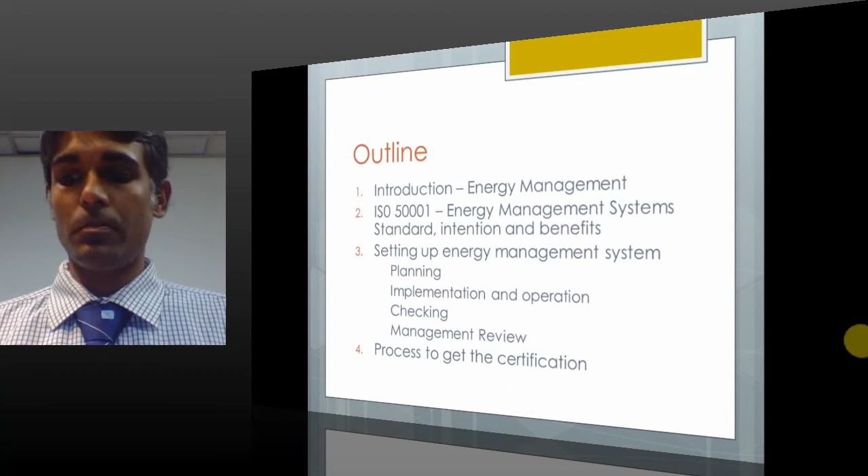So what is energy management? Energy management related, there are few definitions, and we have progressed over time. About 20 years ago, we mainly focused on energy conservation. What is energy conservation? It is reducing energy consumption through using less of an energy service. So we just turn off our lights and save energy, but we remain in darkness, kind of thing. That is called energy conservation.

That means we sacrifice some of our comfort to save energy. But at the present time, we mainly focus on energy management. What is energy management? Continuous process of optimizing energy usage without affecting quality or energy services delivered. So your comfort is not affected, but you continually reduce the energy by improvement of processes using new technology, energy efficient technology. In that way you progress. That is called energy management.

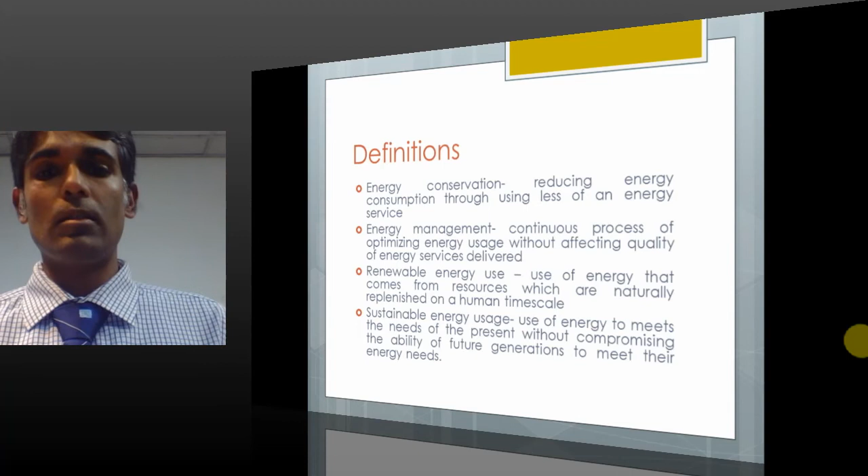And there is another thing, renewable energy usage - use of energy that comes from resources which are naturally replenished on a human time scale. This should come next, and then sustainable energy usage. What is sustainable energy usage? It is use of energy to meet the needs of present without compromising the ability of future generations to meet their energy needs. So it is a combination of energy management and renewable energy usage.

So this ISO 50001 is an energy management standard based on the second definition, but actually it touches some of the renewable aspects as well. So I think it is more suited for the fourth definition, but anyhow it is defined as an energy management standard. So what is ISO 50001?

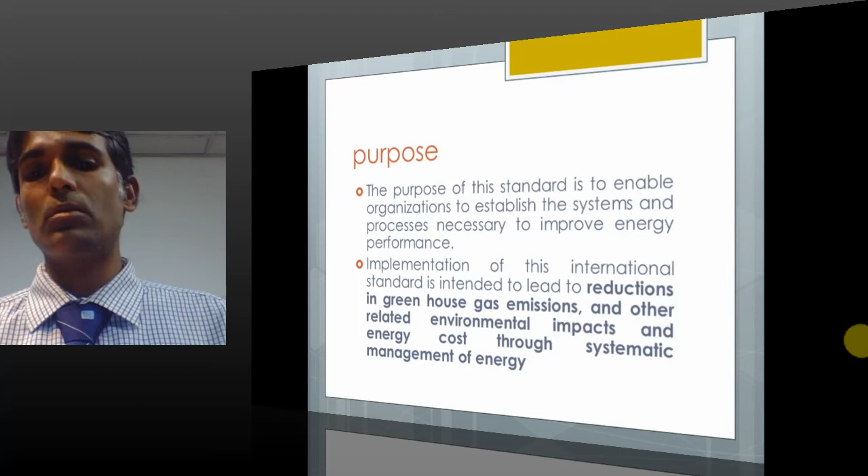Energy management put into an internationally recognized framework. It's quite the same as ISO 9000 and 14000 in the structure. So the purpose of this standard is to enable organizations to establish the systems and processes necessary to improve energy performance, and it is expected by implementing this standard to reduce greenhouse gas emissions and other related environmental impacts, and also reduce energy cost through systematic management of energy.

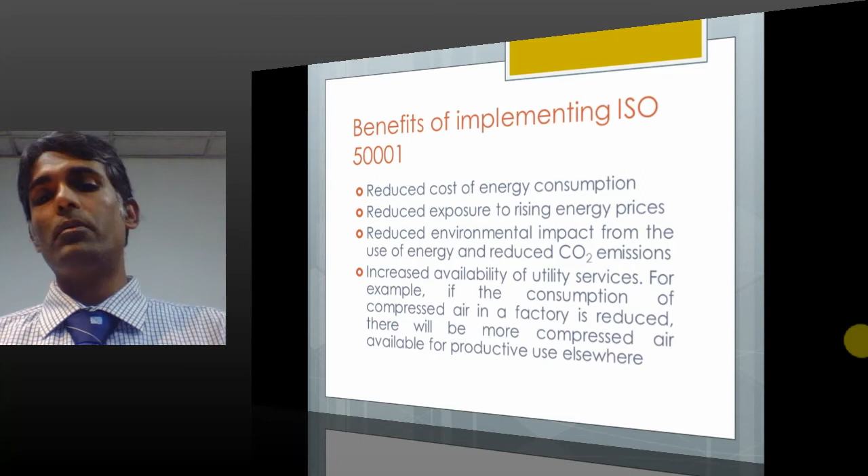For example, if the consumption of compressed air in a factory is reduced, there will be more compressed air available for productive use elsewhere. And improved control of operations leads to improved productivity and stability of operations, because operational controls related to energy are covered by this standard.

And improved comfort levels in buildings, including temperature, ventilation, lights, because when you improve the energy situation, sometimes for example, if you introduce LED lighting, most of the time you get better lux levels than the previous lighting systems, at the same time reducing energy. That is also true for air conditioning systems like that.

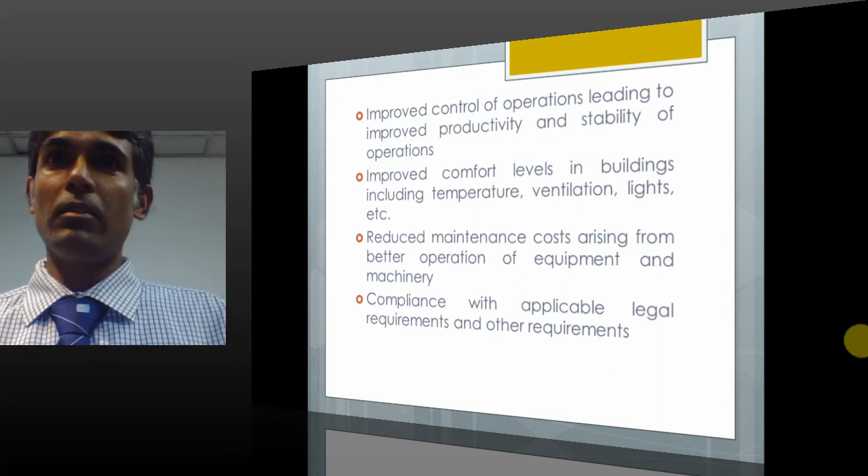And reduced maintenance costs arising from better operation of equipment and machinery, and also compliance with applicable legal requirements and other requirements. Many organizations get to know these legal requirements because of this ISO standard, because only when they are going to implement these standards are they looking for these regulations. And I have met many people while I was auditing who never knew about these energy related regulations before implementing ISO 50001.

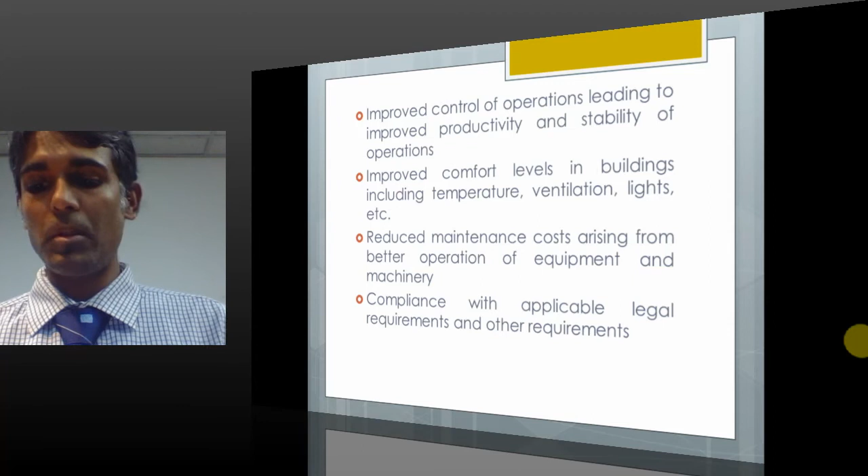So now I move on to setting up of energy management system. This starts with the top management commitment. What should the top management do? First, they should define the scope and boundaries, whether they can include whatever the processes or the buildings, whether it is covered in this standard or not, that should be defined by the top management.

And then they should define energy policy, and also appoint an MR, management representative. Usually he can be an energy manager or senior person from the organization, and energy management team. And then the top management should provide resources, human resources, technology resources, and financial resources to maintain this system.

Most of the time these systems do not work simply because the top management has very less commitment. Sometimes they just want to get the certificate, but after that they are not providing these resources. And also the top management should communicate the importance of energy management system to the organization.

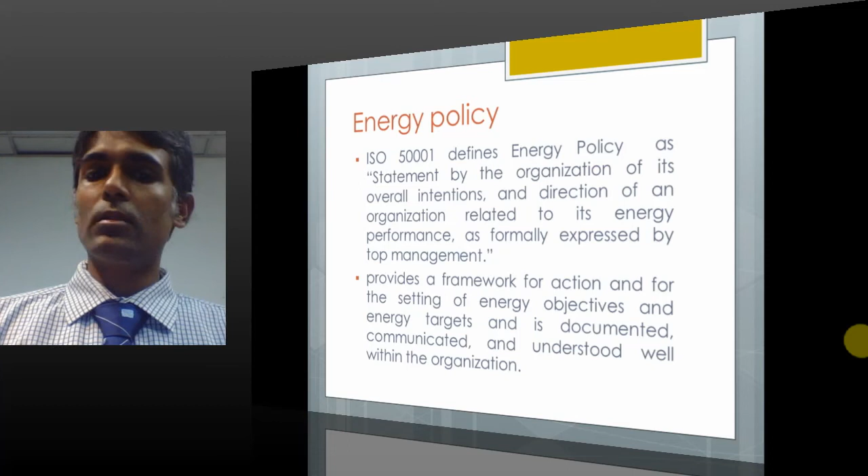So this is energy policy. What is energy policy? Energy policy is the statement by the organization of its overall intentions and direction of an organization related to its energy performance, as formally expressed by the top management. It provides the framework for action and for setting of energy objectives, targets, and is documented, communicated, and understood well within the organization. So it actually provides the framework for future action, a brief document.

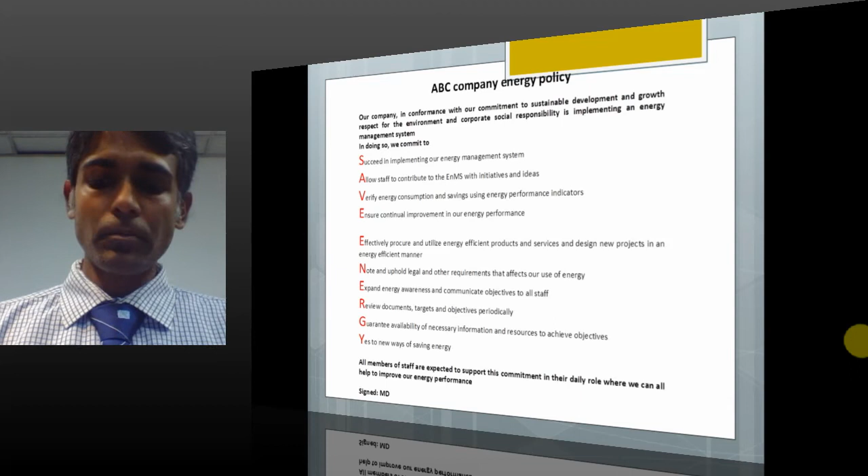This is a sample energy policy, a very simple document, one page, and it says save energy, and each of these sentences, if you take together, address the above mentioned points that should be included in the policy.

So the role of management representative is to ensure the energy management system is established, implemented, maintained, and continually improved in accordance with the standard, and he should identify persons within the energy management team and define responsibilities, and he should report to the top management on system performance and energy performance and promote awareness of energy policy and objectives to the organization.

So once the initial setup has been done, then we move on to the actual implementation of the standard, and it is based on the PDCA cycle: planning, doing, checking and act. The planning phase constitutes conducting energy review, establishing energy baseline, energy performance indicators, objectives, targets and action plan in accordance with the organization's energy policy.

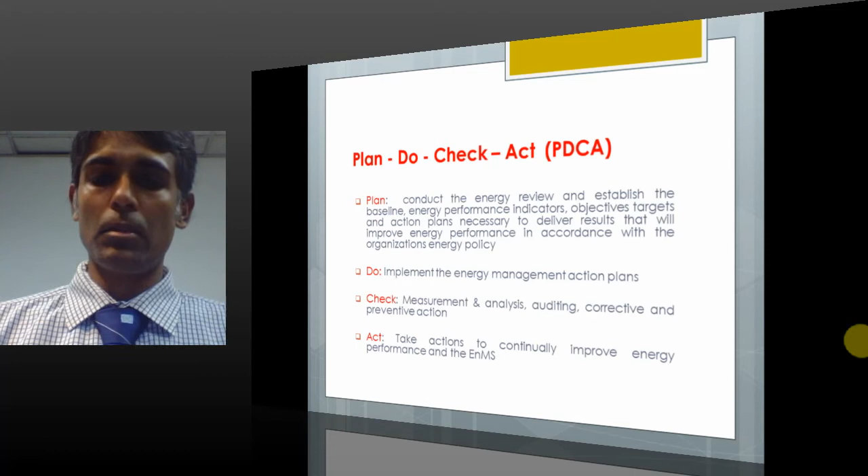The do phase is implementing the energy management action plan. The check phase is measurement and analysis, auditing, corrective and preventive action. And there's also the act phase, take actions to continually improve energy performance and the energy management system. The act phase is actually the management review.

So energy planning phase, what should you do first? First you should understand the legal and other requirements that would affect your energy management system. You should thoroughly study the legal and other requirements related to this energy management system that can be directly energy related, environmental related, safety and health and quality.

For example, for safety and health, there are regulations on standard lux level that should be maintained in factories, so that you just cannot reduce the lux level arbitrarily. In that case, you should know these kind of regulations, although they are not directly on energy, but on safety and health.

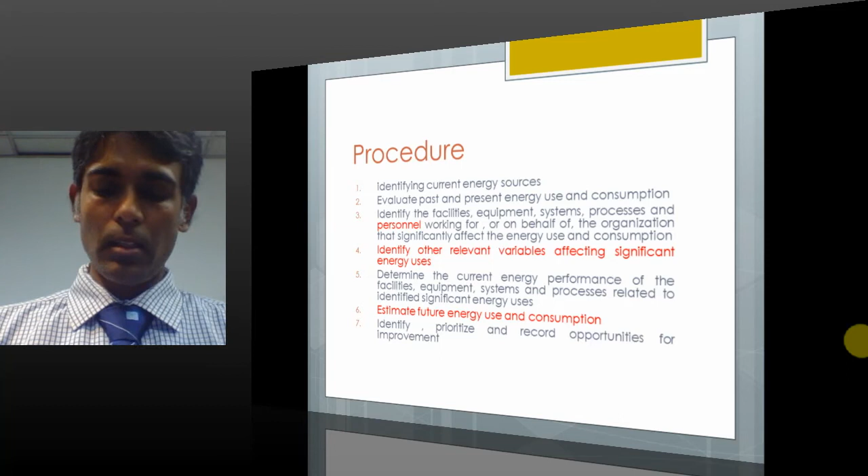So what do you mean by identify current energy sources? If the company uses several types of energy, you should first identify these things, and then evaluate past and present energy use and consumption. What do you mean by this?

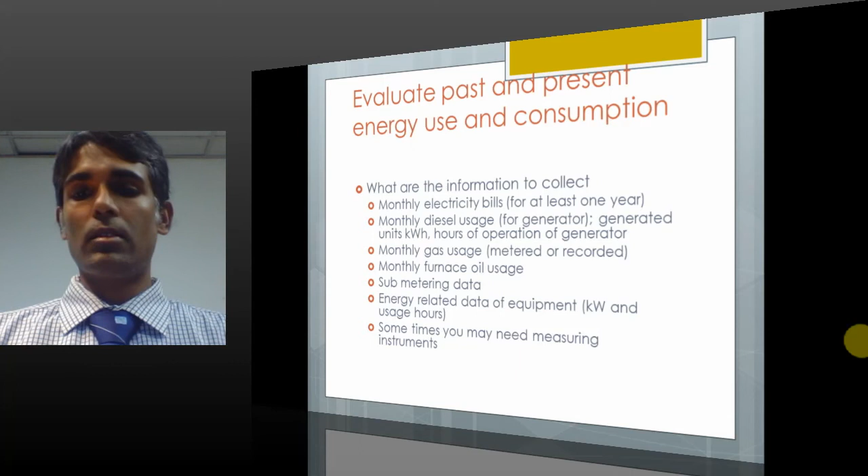So these are the information to collect: monthly electricity bills, diesel, gas, furnace oil, the kind of energy usage records, and then submetering data, energy related data like kilowatt and usage hours of equipment. And also sometimes if you don't have this kilowatt values on the nameplates, you can use measuring instruments to get the values.

By using this information, you need to identify the facilities, equipment, systems and processes that become the significant energy users. How do you do this? Using the simple way, with the information collected you can construct the energy balance. Your largest energy consumers generally become the significant energy users, unless you have already made some improvements. And if there are fewer improvements that can be made to the largest energy consumers, then other smaller ones that offer significant opportunities can be considered as significant energy users.

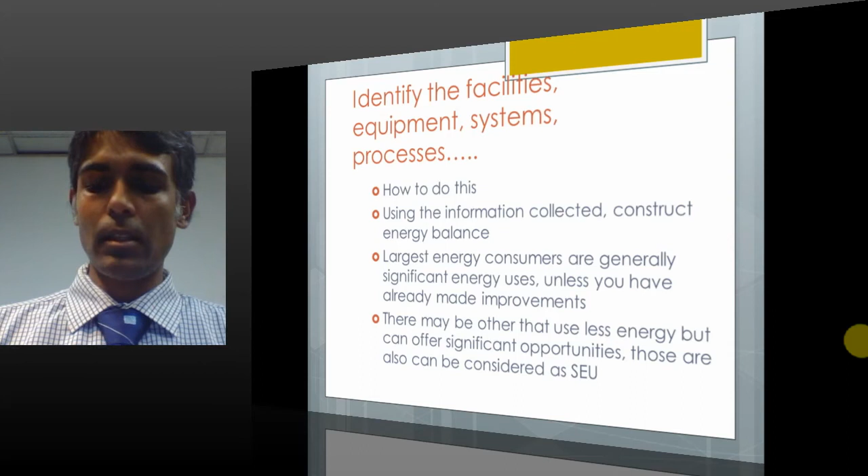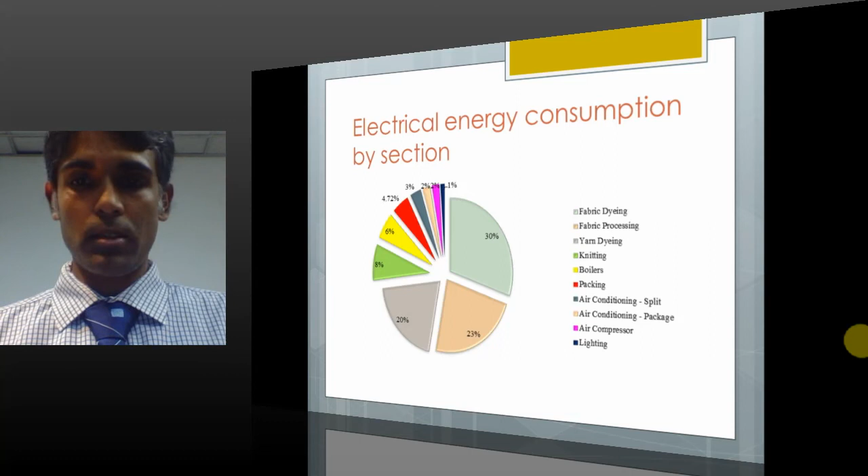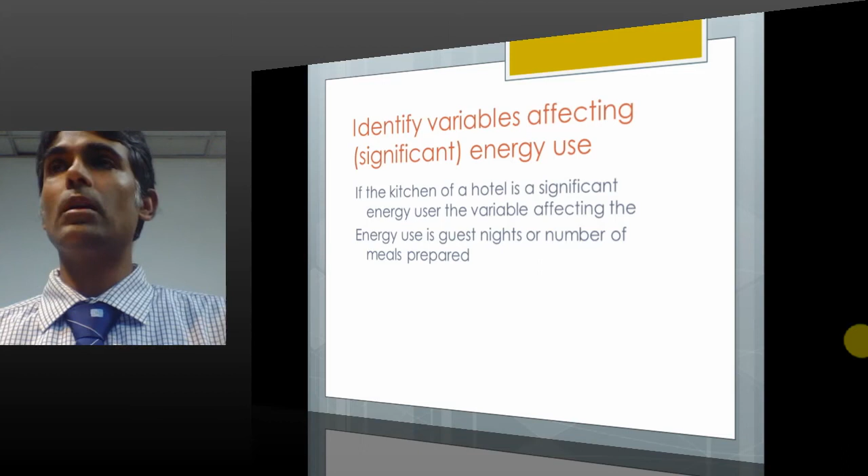After identifying the significant energy users, you need to identify the variables affecting significant energy use. For example, if the kitchen of a hotel is a significant energy user, the variable affecting the energy use is guest nights or number of meals prepared. These kinds of things you need to identify.

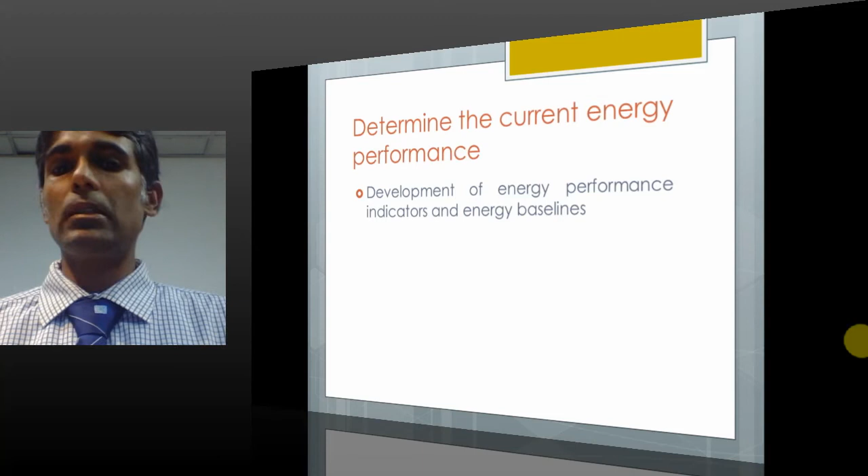Then you need to determine the current energy performance. That means you need to develop energy performance indicators and energy baselines. And then you need to identify, prioritize and record opportunities for improvements. If the system is not complex, you may do it yourself; otherwise you may need the service of an energy auditor. The energy auditor can identify the opportunities that can be implemented for saving energy. The future energy use and consumption should also be estimated to get a forecast for the next year. If you have an estimate of production for the next year, you can get the energy forecast based on the performance models developed.

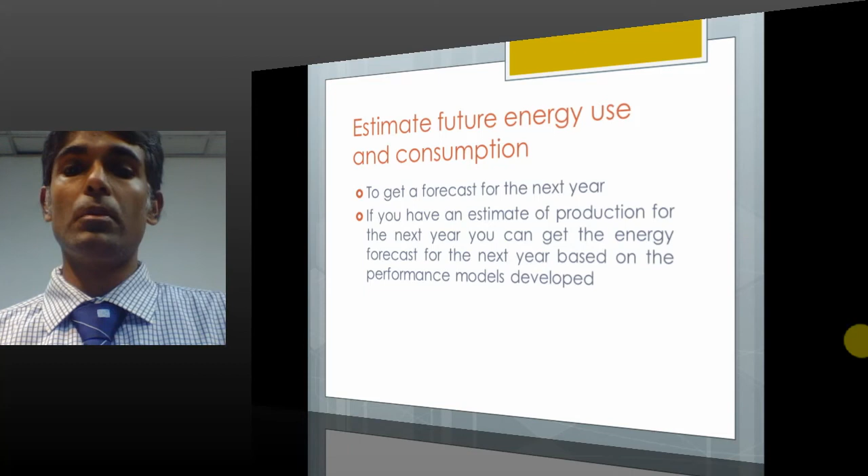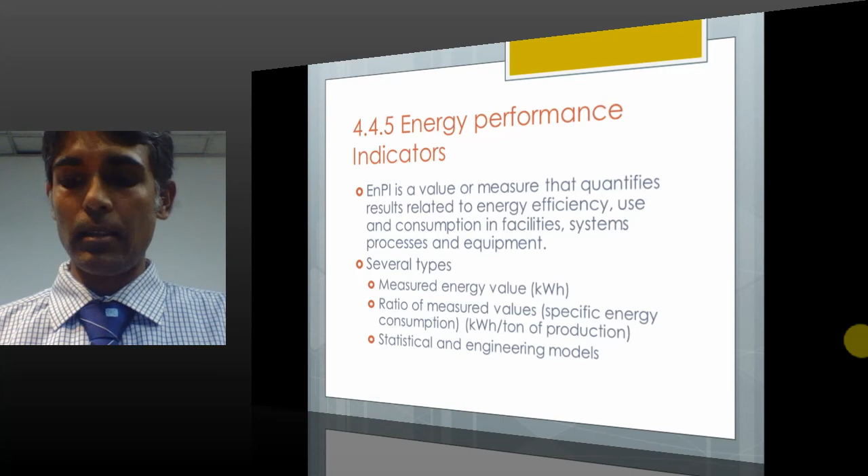So what are the energy performance indicators? Energy performance indicators are of several types. You can use the measured energy value, and also the ratio of measured values. For example, specific energy consumption, that is kilowatt hour per ton of production. If there is no base load, you can use this ratio of measured values. A measured energy value alone is not a very good energy performance indicator because it does not account for variable factors. There can also be statistical and engineering models serving as energy performance indicators.

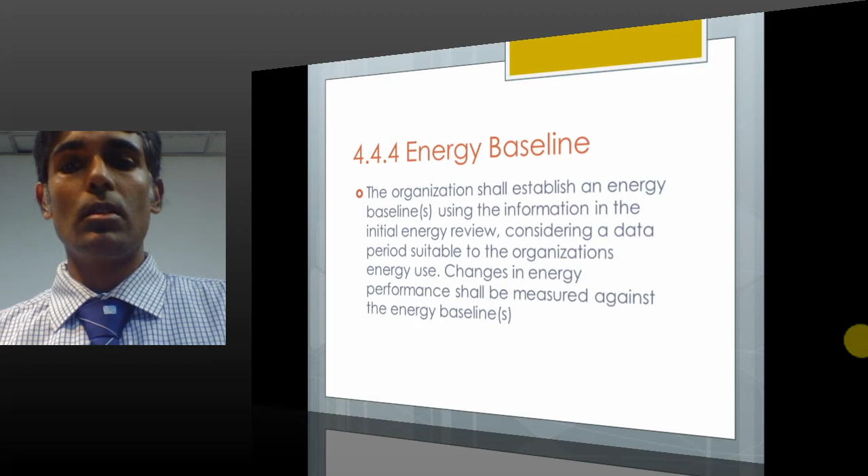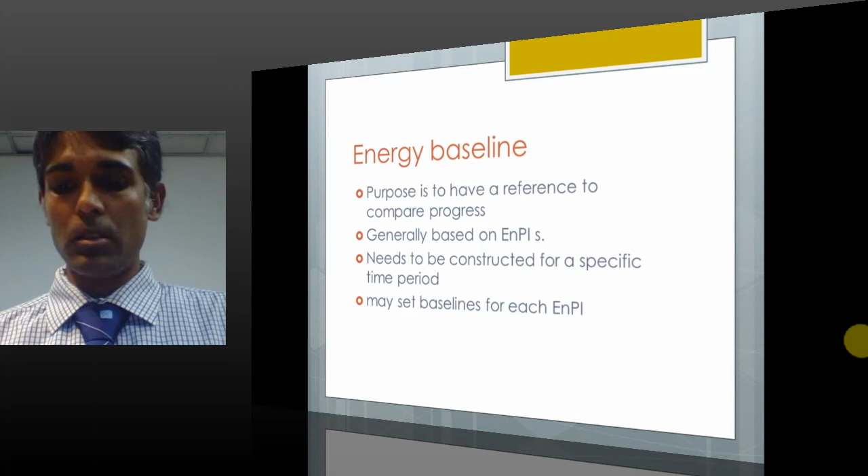So the baseline — the energy performance indicators and the baseline. What is the baseline? The organization shall establish an energy baseline using the information in the initial energy review, considering a data period suitable to the organization's energy use. The purpose of the baseline is to have a reference to compare progress. Generally, it is based on energy performance indicators constructed for a specific time period. You may set a baseline for each energy performance indicator. To explain it, I have taken a real example.

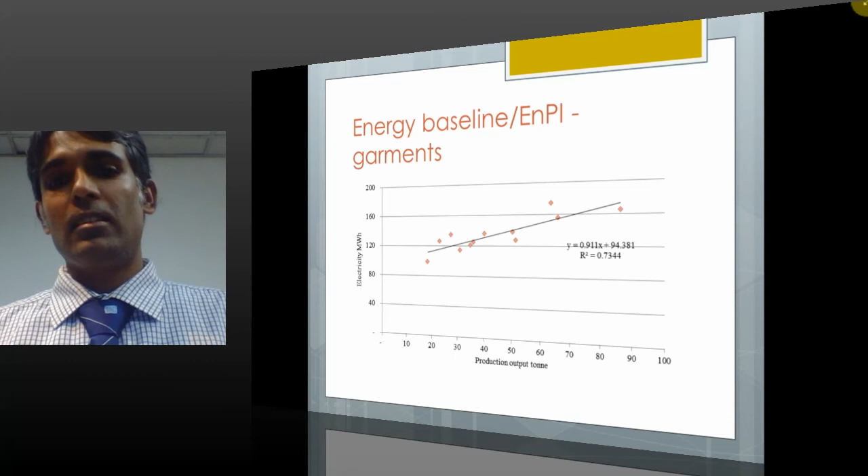So what's an objective? An objective has a broader scope than a target. You can set an objective for a significant energy usage, such as reduction of firewood usage — just a simple thing. A target is more specific, such as reduction of steam usage for the dyeing process by 5% from the set baseline. You can also set a date for achieving it.

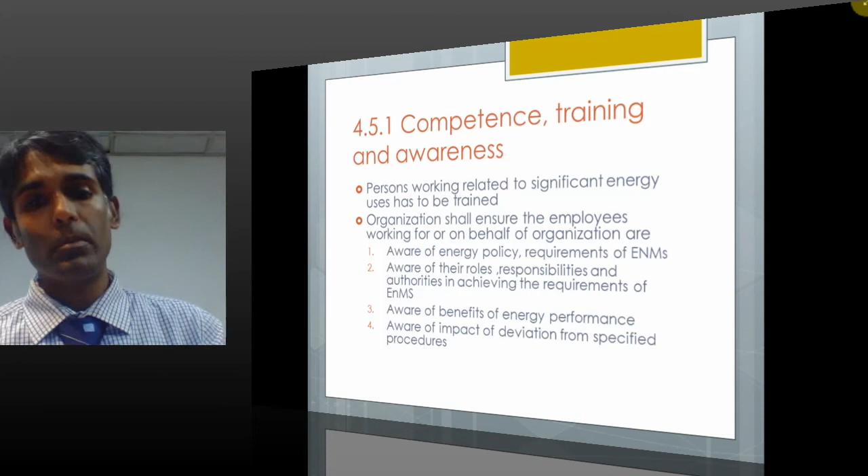So competence, training and awareness. Persons working related to significant energy uses have to be trained. The organization shall ensure employees working for or on behalf of the organization are aware of the energy policy and requirements of the energy management system, aware of their roles, responsibilities and authorities in achieving the requirements of the energy management system, aware of the benefits of energy performance, and aware of the impact of deviation from specified procedures.

And the organization shall communicate internally and may communicate externally about the energy management system. To get the ideas of the personnel of the organization, you need to implement some system. You can place a box where the employees can put their ideas, which you will collect to get better ideas for better implementation of the standard.

So then you need to have documentation. What is a document? Information used to support an effective and efficient organization operation, usually generated within the planning phase. So there's a difference between a document and a record. Documents can change. If you are familiar with other ISO systems, you may remember that documents have versions - version 1, 2, like that - but records don't have versions.

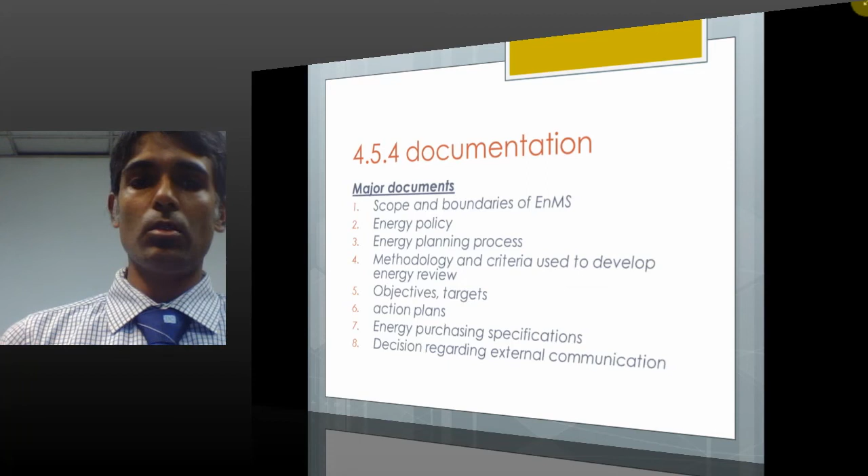They are actually a snapshot in time - you can't change the records. So these are the major documents: energy policy, scope, boundaries, planning process, like that. There are 8 compulsory documents, and generally these documents are organized as an energy management manual. It would refer to the procedure manual, and procedures referring to formats and other exhibits.

This documentation need not be in printed format - you can use electronic format as well. And the organization shall establish, implement and maintain procedures for effective document control. I am not going into detail, but you can refer to the standard to identify what has to be done for document control.

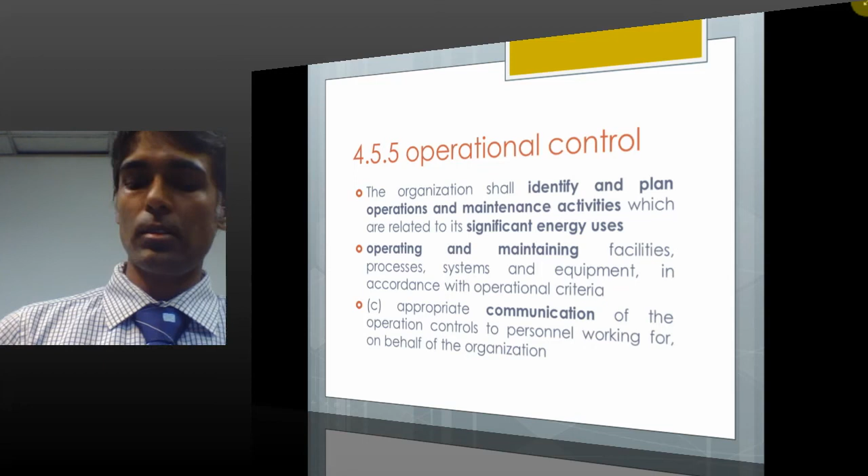So the documentation, communication, and then it comes to actual implementation - the operational control, design and procurement. Operational control means the organization shall identify and plan operations and maintenance activities which are related to its significant energy uses, and operate and maintain facilities according to operational criteria, and also appropriately communicate this operational control to the personnel working for the organization.

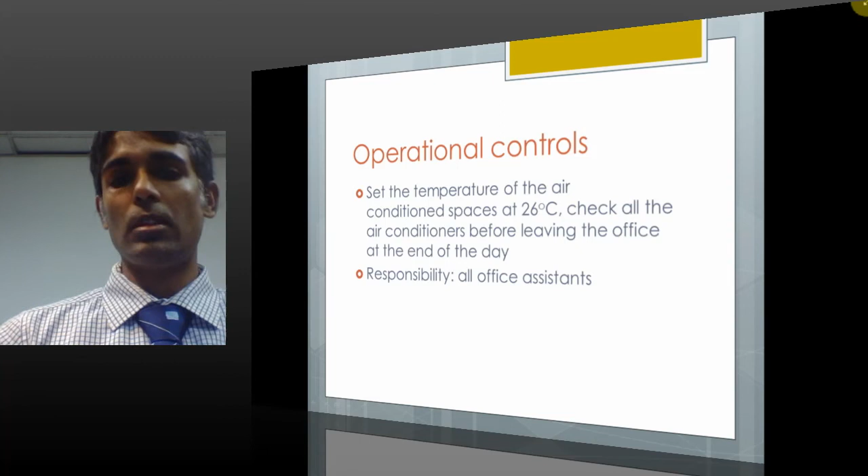Check all the air conditioners before leaving the office at the end of the day - responsibility has been given to the office assistants. For a poultry-processing plant, blast freezers account for about 67% of the total energy usage, and the workers must know that the blast freezers should be loaded only when the weight of chicken exceeds 100 kilograms. If not, what will happen is they just open the door for a lower load, and then a lot of cold air comes out, causing a lot of energy wastage.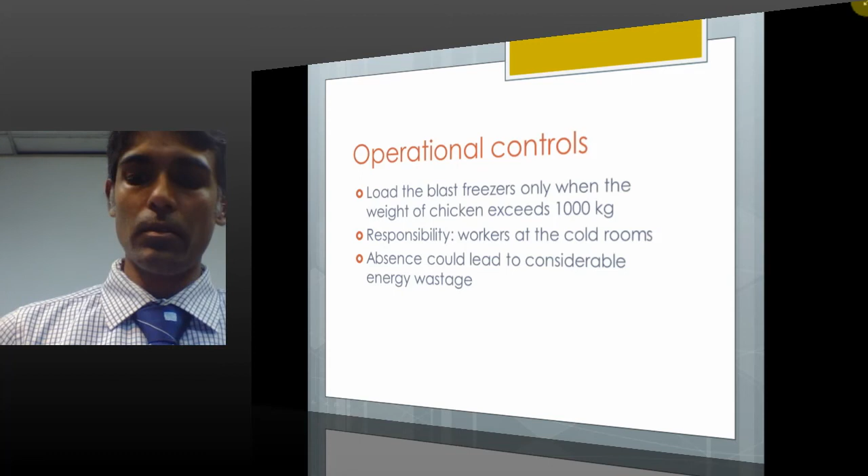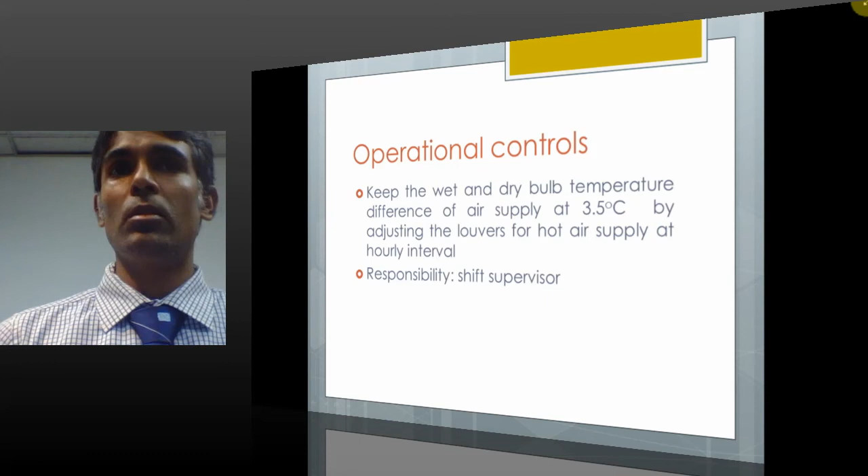For the tea industry, 50% of electrical energy is used for the withering process. This can be minimized by controlling the wet and dry bulb temperature difference, meaning the relative humidity and temperature can be effectively controlled. If you do not put the value at 3.5 degrees difference and above, you will not get the required withering, it will be over withered. Below that, it will take more time, and the fans may be operated for many hours, maybe 3 hours or more.

Because the drying rate can be correlated to the wet dry bulb temperature like this, there is a drastic reduction in drying rate if you reduce the wet dry bulb temperature to 2 degrees centigrade. So it's a very significant operational control.

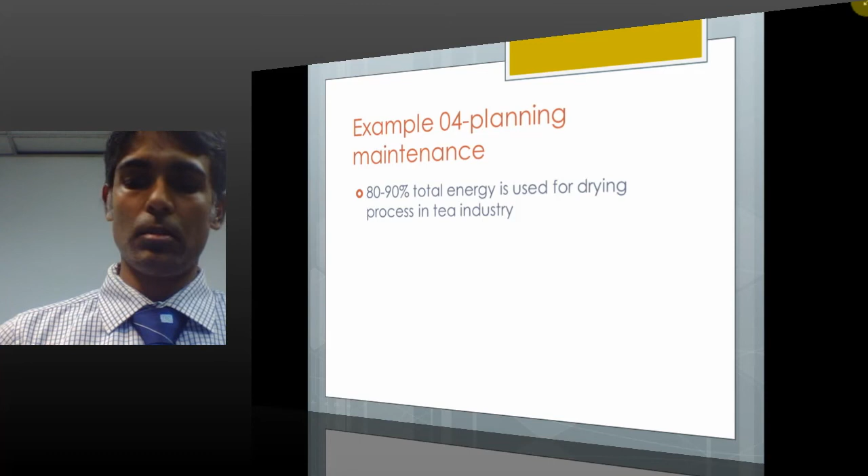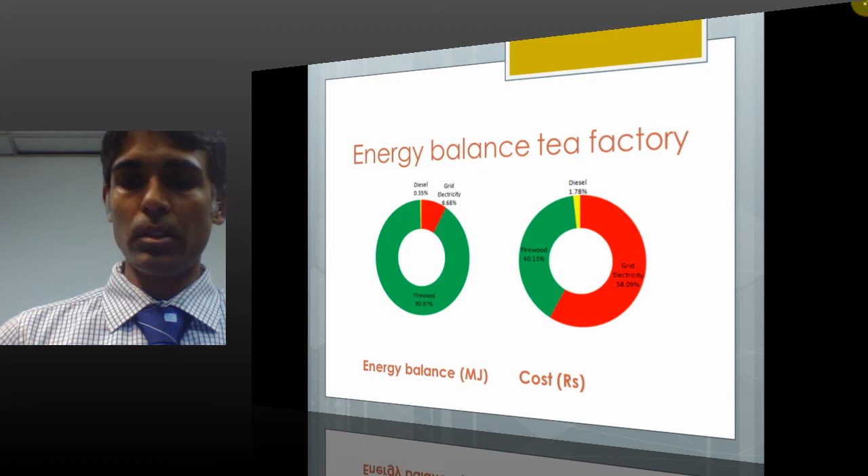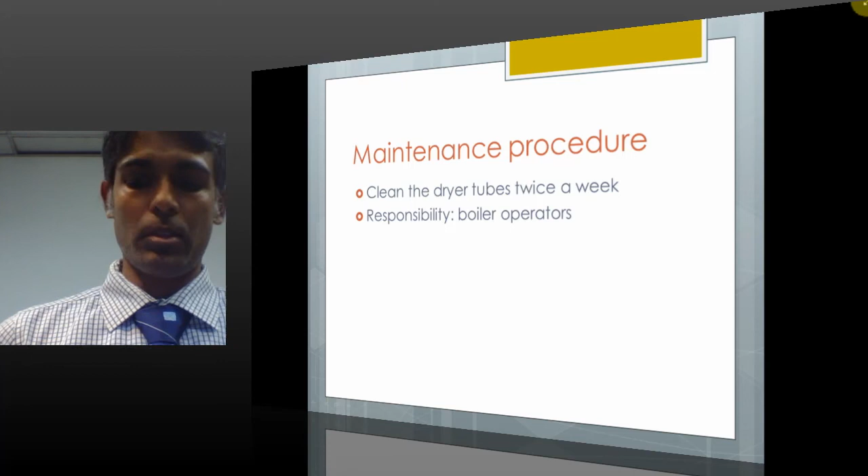These operational controls apply not only to parameters like temperature, pressure, and relative humidity, but also to maintenance aspects. For example, in a tea factory, firewood consumption accounts for about 90% of the total energy, so it's a significant energy user. To reduce firewood usage, one thing you need to do is clean the dryer tubes very frequently, because if soot deposits on the dryer tubes, you will consume more firewood to get the required heating effect. So it is quite obvious that the boiler operators should be informed about this operational control.

This communication to the workers can be verbal, printed, or in any form. Workers should be knowledgeable of the consideration. So operational controls, I think, are clear to you now.

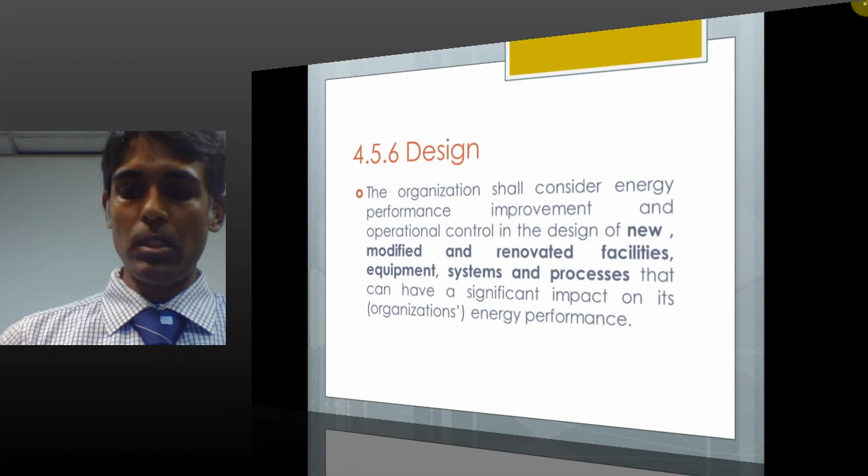Then what we should do is focus on the design. If the organization is designing new, modified, and renovated facilities, energy performance improvement has to be considered. The result of the energy performance evaluation shall be incorporated where appropriate into the specification, and once the construction has been finished, the result has to be recorded.

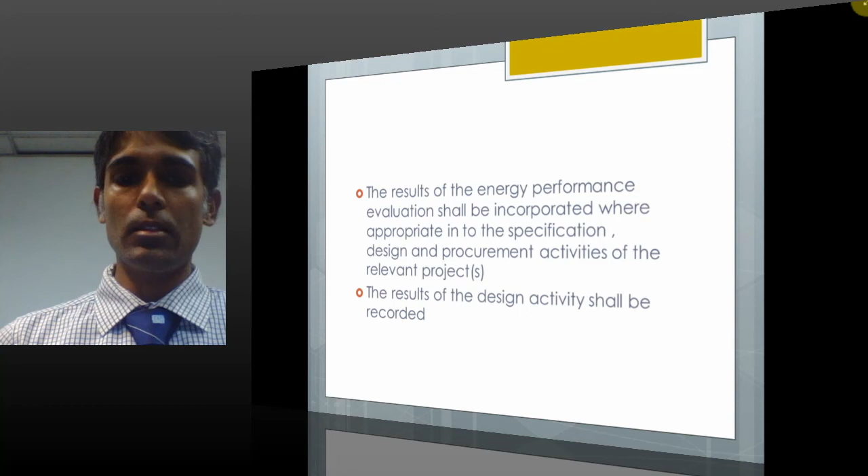For example, if you are designing a new building, you can ask the contractor to comply with building code and submit an evaluation of energy usage.

For example, if you are designing a pumping system, there may be several options: one pump with throttling, two smaller pumps in parallel, or one pump with VSD. In terms of energy consumption, the one pump with throttling may be quite a high energy consuming option, but initial cost may be low, so sometimes it may be costlier over time. You can go for the one pump with VSD option.

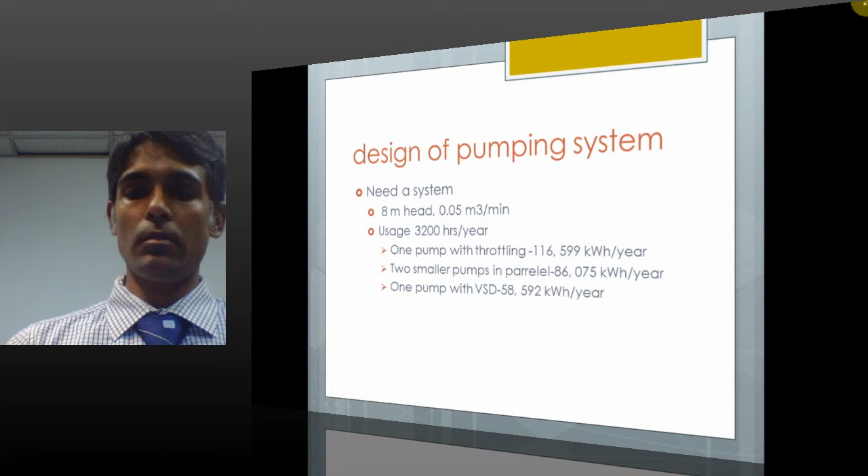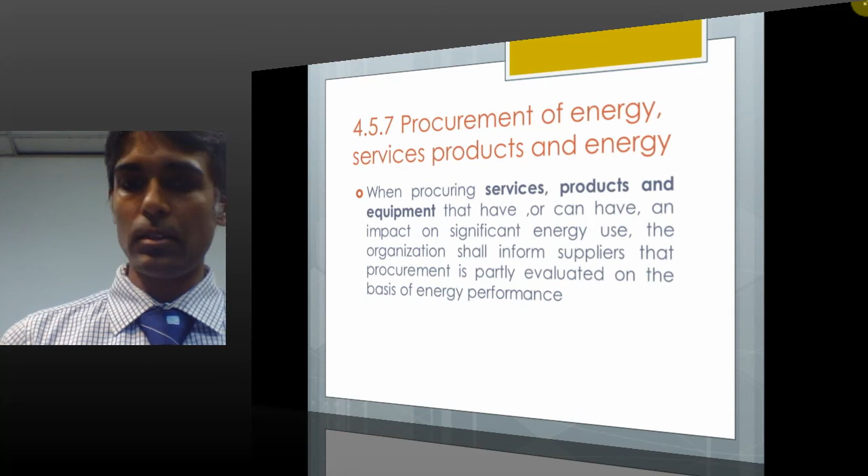In procurement of energy services, products, equipment, and energy itself, you need to establish criteria for assessing energy consumption and efficiency over the expected lifetime. You need to define criteria for purchasing energy using equipment for the significant energy users.

For example, for lighting, you can set a criteria that we are going for life cycle cost for this kind of application. For example, if you use incandescent lamps, the total cost is not only the lamp cost but the energy cost, and there can be several lamp replacements. So the total cost for incandescent will be 7,200, and if you go for LEDs, it's only 2,100.

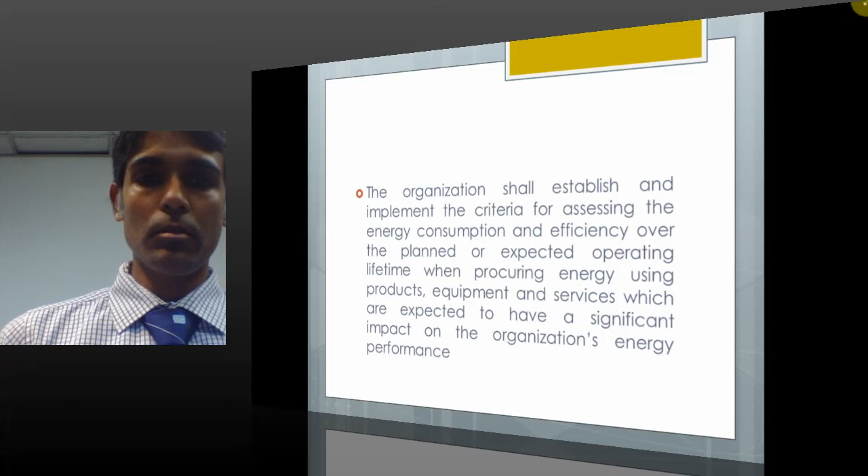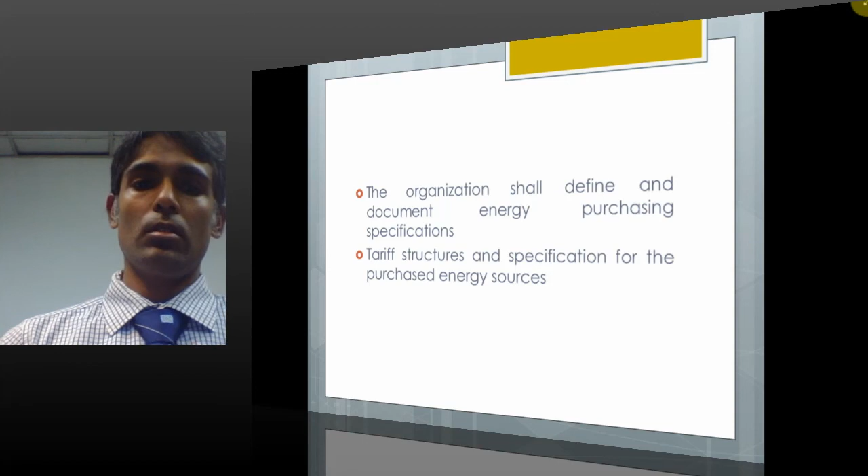The organization shall also define and document energy purchasing specifications. What are the energy purchasing specifications? Not only for energy using products, services, and equipment, but also if you are purchasing energy, you should develop specifications for the purchased energy sources, because in some countries there can be cheaper energy providers. In our case it is not applicable, because anyhow the tariff structure is quite the same for organizations, since we need to go for CEB or LECO, and they follow the same structure.

After that we move on to the check phase: monitoring, measurement and analysis, evaluation of compliance with legal and other requirements, internal auditing, non-conformities, corrective and preventive action, and control of records.

So, monitoring, measurement and analysis: what to monitor? Significant energy users, relevant variables related to significant energy users, energy performance indicators, effectiveness of the action plan in achieving objectives and targets, and also evaluation of expected versus actual energy consumption.

There should be an energy measurement plan, which should be defined and implemented. It should include what is measured, the measuring instrument, the interval of measurement, and responsibility, and should use reliable measuring instruments, meaning the measuring instrument should be calibrated.

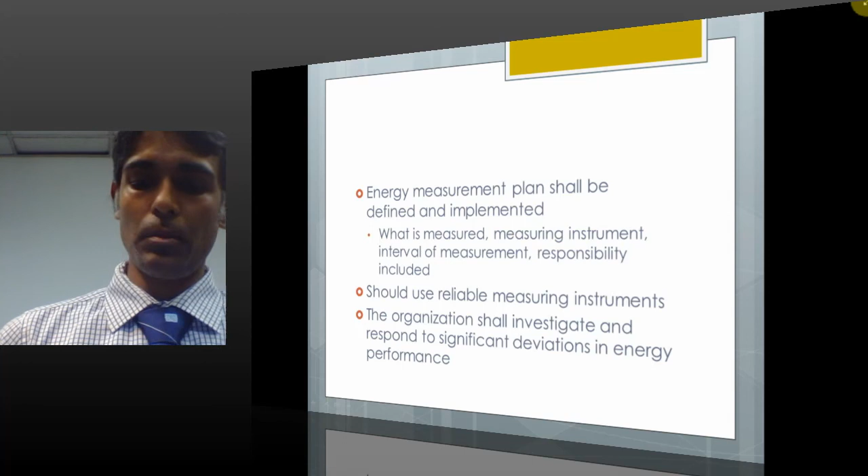The organization shall investigate and respond to significant deviations in energy performance. And even in this phase, the legal requirements should be reviewed.

Then you should do internal auditing. Basically what you do in an internal audit is quite the same as for the external audit. Different departments of the same organization audit the other departments to check whether they comply with the standard. So in this case, the audit plan should be developed considering the importance of the processes and areas to be audited, and also the results of previous audits.

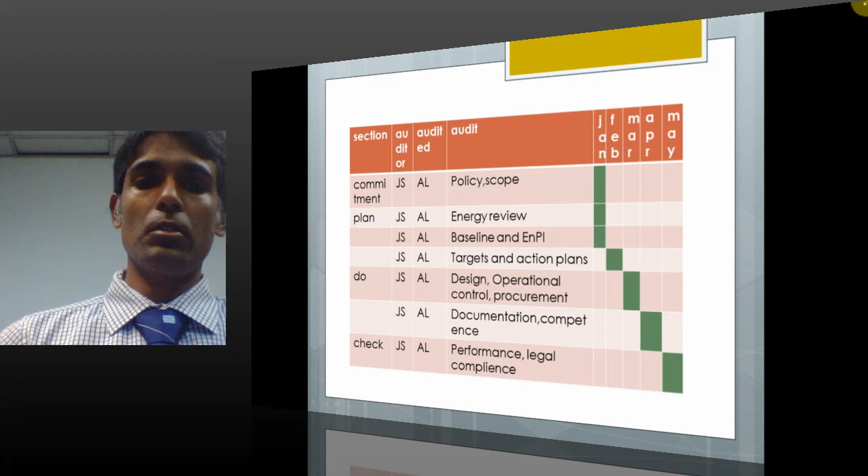Selection of auditors and conduct of the audit shall ensure objectivity and impartiality. Records of the audit should be maintained and reported to top management. At the management review, you should present it to top management. So this is a kind of audit plan, where one department audits another department on the policy, energy review, baseline, and similarly on various clauses of the standard.

And in the audit, non-conformities can be raised, and you need to take correction, corrective action, and preventive action. What's a correction? It's an immediate action taken to rectify a non-conformity.

For example, in the internal audit it has been revealed that a higher temperature has been used in an oven, so the temperature should be lowered. So what is the correction? You can set the correct set point, but that is not the corrective action, because it can recur since the operators are not trained. So training the operators is the corrective action.

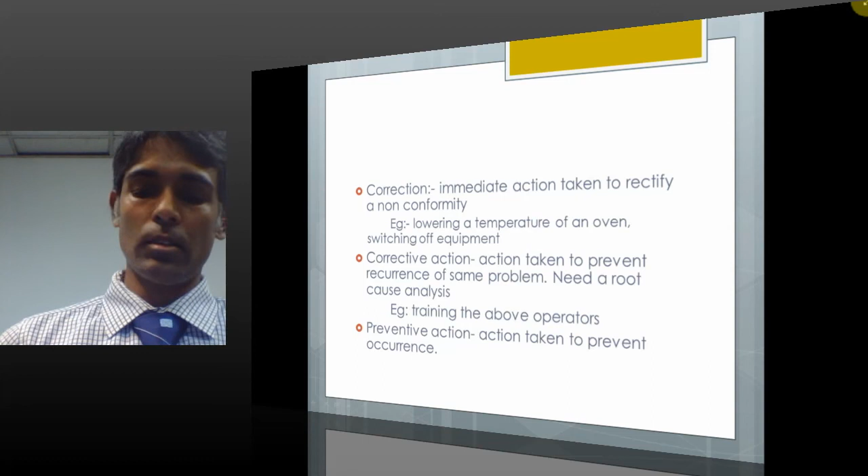So now I think we have completed 3 phases: plan, do, check, and the final one is act. Act phase. What are you going to do? It is typically a regular meeting, called management review, of top management to help consolidate their support for the energy management system. It serves 2 main purposes: to communicate to them what is happening in the EnMS, and also to gain support and make decisions to aid progress in the future.

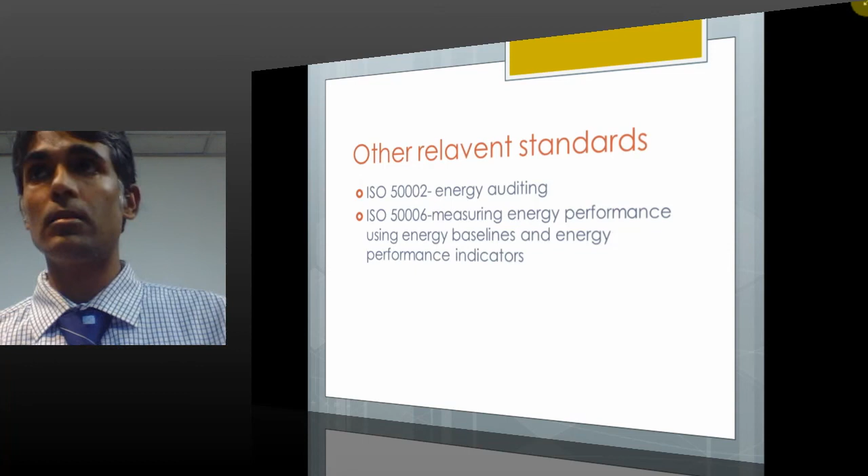So you can get this standard and read it; it is more elaborate on energy performance indicators and baselines. And that is the lecture for today.

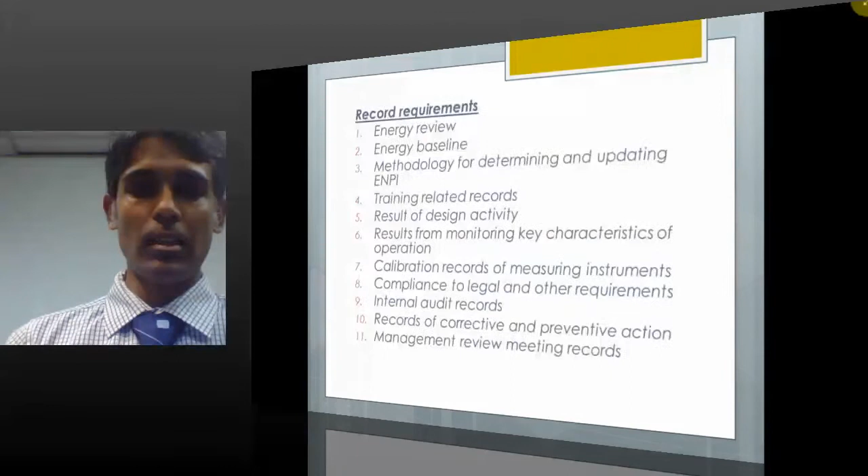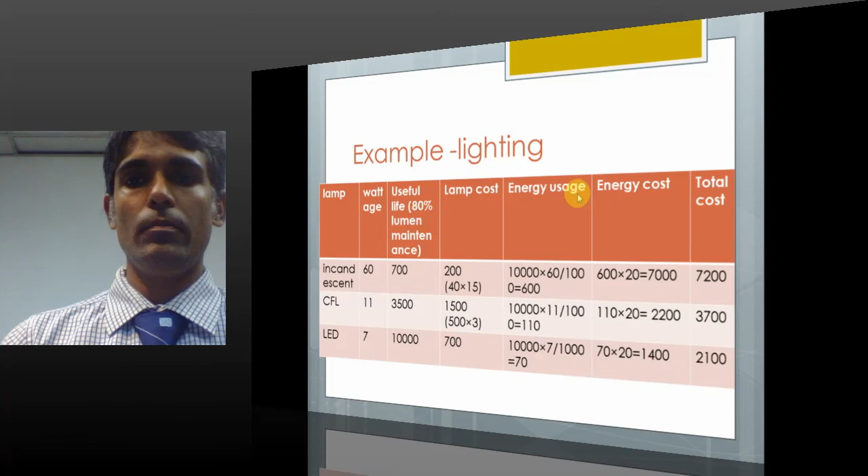How to measure gas performance in the factories? And measure electricity for the gas. What do you mean by gas performance? I mean the energy consumptions and how we analyze it on the evaluation stage. Gas consumption you can meter. I mean, you can use the gas meters even. LP gas meters are available. And if you don't have meters, in some organizations they just weigh the gas cylinders and use that record also. That is enough. Most of the time it is enough.

You may not need, it depends on your organization scale. I mean, if you are a small scale organization, you may not use many meters. Even if you have few meters, you can start this thing. But if the system is getting complex and developed, you can go for the sub-metering and all that. What do you mean by VSD? Sorry? VSD? VSD means variable speed drives. To control the speed of the motors, you can use variable speed drives.